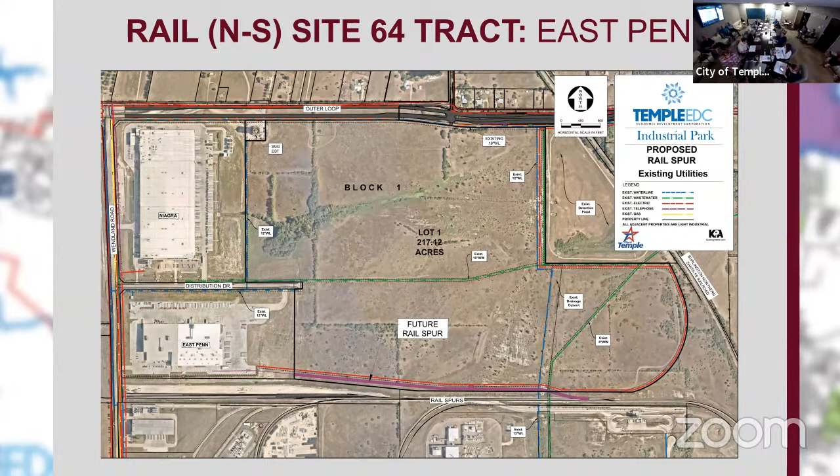We will keep in touch with them. If they want to adjust it, we will adjust, but otherwise right now the plans are ready to go, and it's a 2.187 project.

Again, it's the rail spur that goes off, for the new people, which is you, Bo. Tyler, you know Tyler is new, but he's been through this circus so many times. We're going to tell Bo that there are like 3 or 4 major numbers that we constantly look at on the funding.

One is where are we in the design, and what dollars there were, what is the construction that we're expecting. Then the construction admin is what we have as far as either David or whoever the city wants to do the administration of the contract. And then the last number is right of way, if we have any right of way. So we're always just looking at those 4 numbers, and they're always listed, hopefully within the same quadrant on the financing plan.

Second one, industrial park. I've sort of heard that this thing has already disappeared off of the financing plan, but as far as I'm concerned, it's still on here until we voted it off. And we are looking to take this off. It was $315,000, and I think we've all talked about relocating it. Do you have a comment on this or potential opportunity?

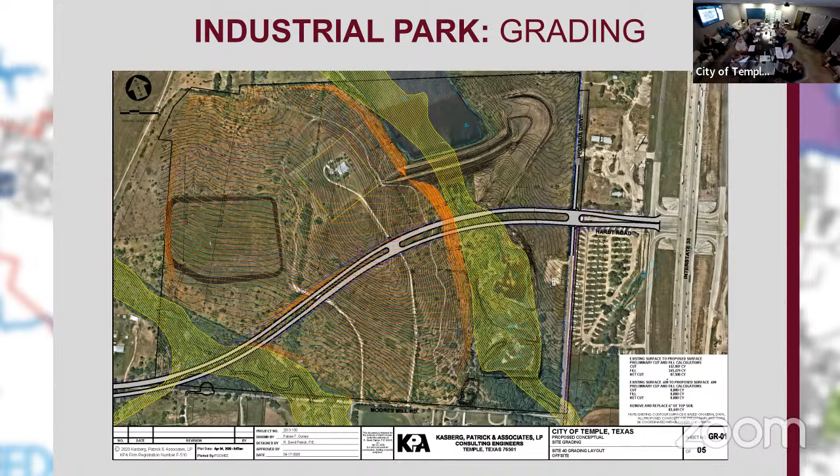Donna told me that number's already been swept too, right, Melissa, or no? We've already completed that project. It was spent on a project. There's about $6,000 left. Okay, it's gone. For this project, as we move forward on the outer loop, we have contingency, so if we're going to need something, we still have a place with some dollars set in it.

Second project, sewer extension, red line that went from right there in front of HEB up past that section, the yellow outer loop that we have. It is in the ground.

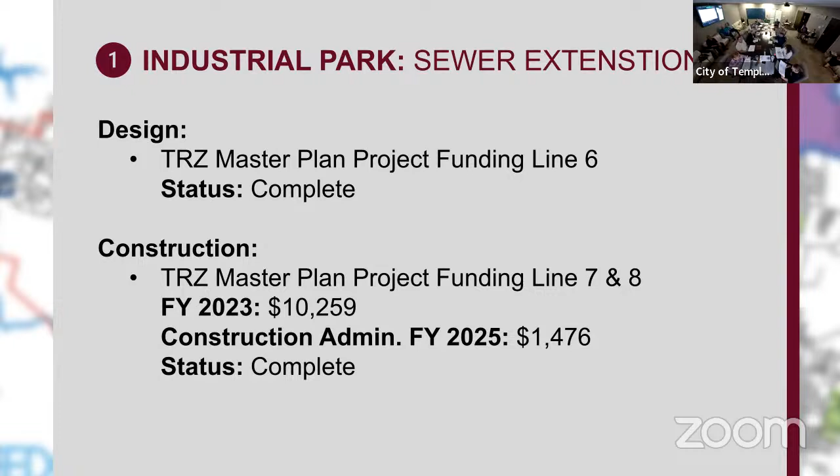Again, the whole project is a completed project, so it's one we won't see again. It's on there for another reason. Still, we will talk about that as we move forward.

One of the things I stated was in 2020, we began the process of making sure we had enough water in the quadrant. We had Rick Kasberg and Ginger come from KPA to give us an update on the whole water system. That was at the early stages of Meta. We had approximately $16 million worth of water projects that the zone took over to make sure we had water in that quadrant. So it was a big portion of what we did to make sure the industrial park was ready.

We're gonna go through these. Each one of the red lines represents additional water lines that we did to continue to push as much water and pressure into the North Industrial Park.

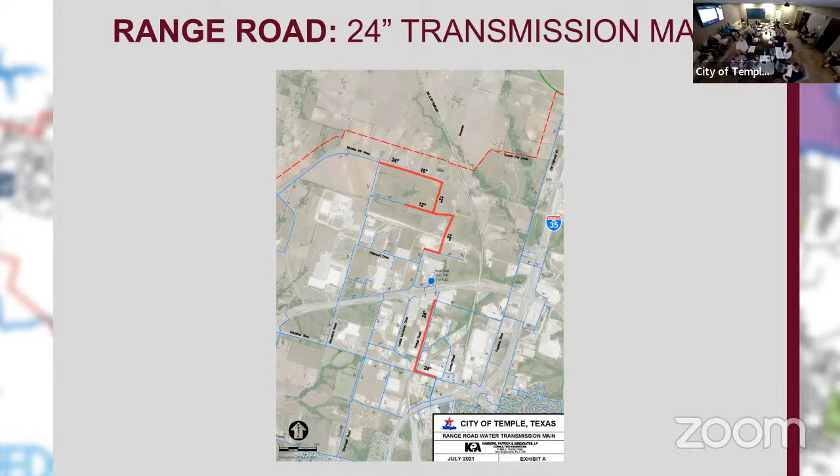One of them was called the 24-inch transmission line. It is under construction, a $2.56 million project. It's expected to be completed this month.

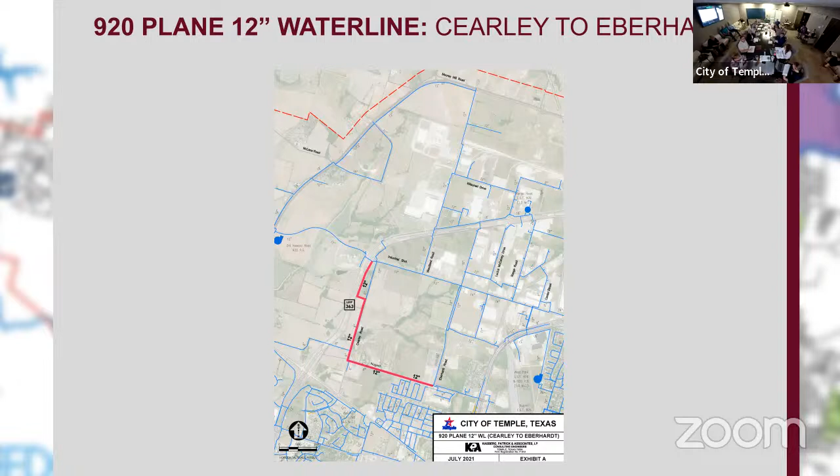Another one was the 12-inch water line Cearley to Eberhardt. Anybody that's been in that quadrant can see them going down Eberhardt for quite a while, and it brings water right into that whole quadrant. It was substantially complete and in service. We have some grass to do around Eberhardt, but that project again is done, and it was a $1.4449 million project. Again, it is completed.

The 920 plane, this is one of the major water lines that was really going to boost the amount of water we were pumping to that quadrant and to the lift station, or to the elevated storage tank. This project is 95% complete as far as the drawings.

It is $5.09 million. This is one we are planning on holding. I was a little concerned because I had it in red. Does that mean none of them are in there for my brain? Just letting you know, I hadn't gone through this, so my brain might have to adjust and actually think, which is always hard at 7 a.m. for me. Again, this is a project. Huh? Yeah, this one we're talking about. Yeah, yeah, I was talking to myself. Okay, on my, I don't want to engage in that conversation. It is a really dark one. On my slides, I use my slides to make sure I can turn the switch on, and so I thought I had anything we were trying to move in red, so I didn't have to think, right?

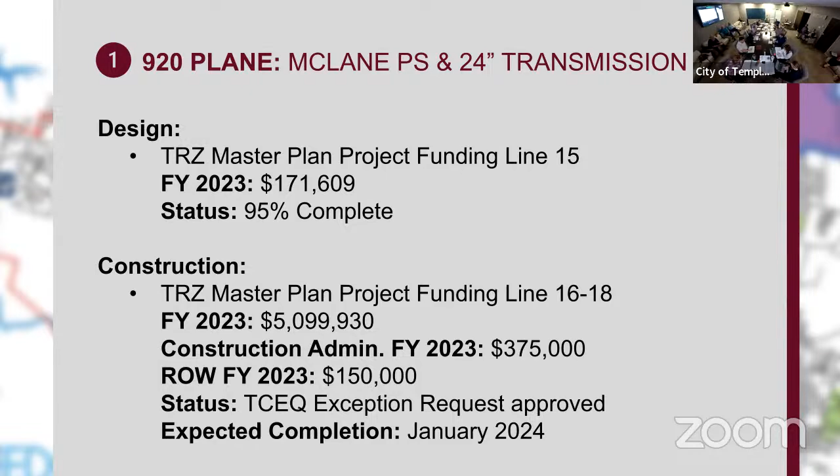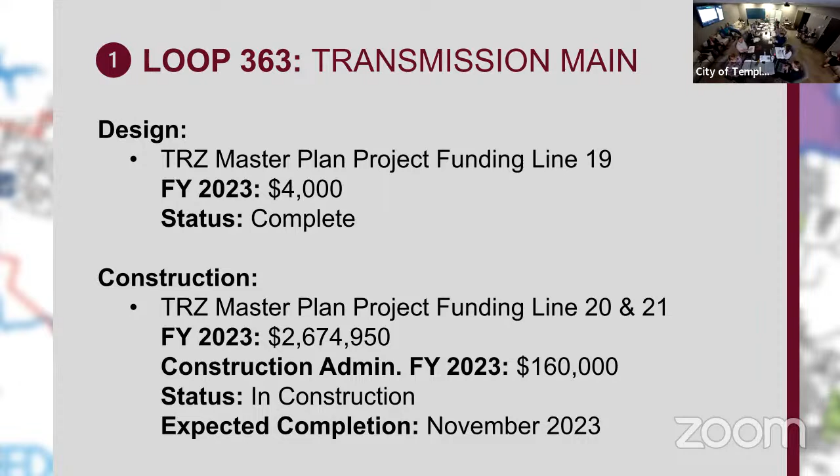Another project in that quadrant is the transmission main, which we call the 363. All design is complete, and we have an expected completion for this water project in November. It's moving forward and really enhances the whole quadrant.

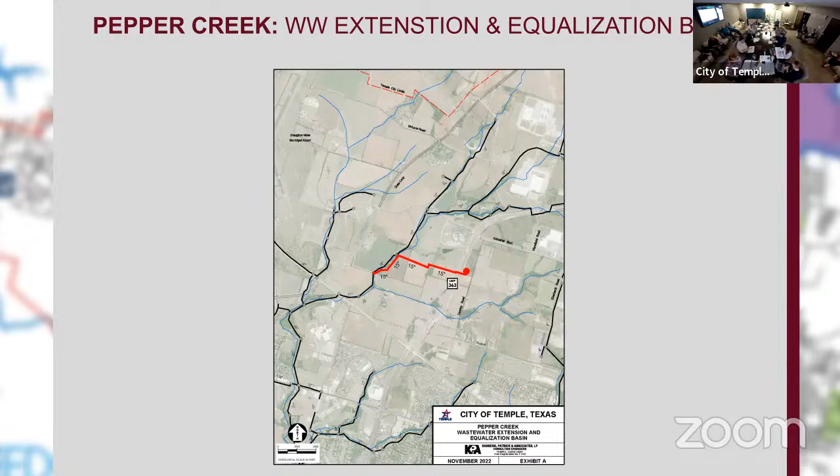We've got the wastewater extension and equalization basin. This is a sewer project, and if you drive down the loop you can see it being done. We had some savings on this in an earlier financing plan, but it's still just a project with completion in November, bringing sewer into that quadrant. It'll stay on until the next financing plan when we clean them up, but since it isn't completed, we'll keep it on.

The Pepper Creek trunk sewer - again, when you're doubling the water use in a quadrant, a lot of that water's got to end up going down to the sewer plant. Most of these projects had large water uses and a lot of discharge. Some of these have also been put on hold because the water use in that quadrant is way less than half of what they were expecting.

This is a project that we'd also like to put on hold again - we don't really need it. The last time we reviewed this with David, we still had the easements remaining. If you see the bottom corner, it tells you how many we need and how many we received. So really a double fold on this one - we're putting it on hold, and it isn't ready to be released anyway. We'll wait until we get more money and/or a heads up that a project is going to require us to finish this project.

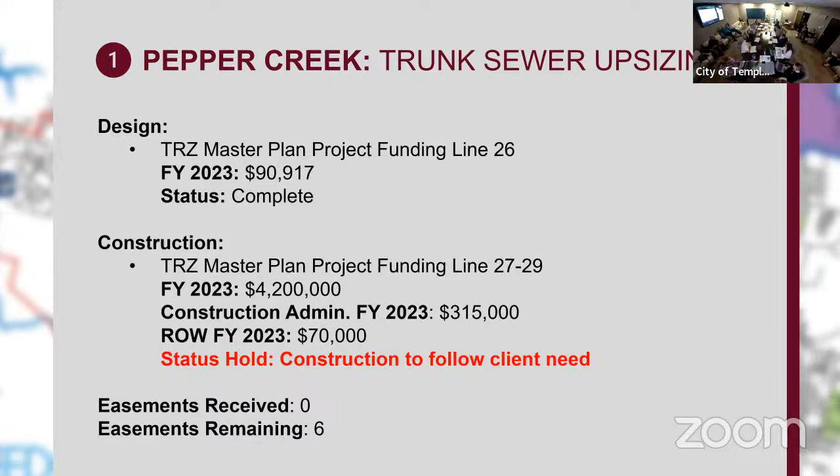If you've been out to that quadrant, one of our projects was the 3 million gallon elevated storage tank and the 24-inch transmission main. If you've been out there you'll see it - that was a $7,266,691 elevated storage tank. We're about to walk away from most of our water projects in our financing plan. We've done close to $15 million worth of water projects already in this quadrant, and I think it puts us at a good spot.

Staff has asked, John, will you make sure that I get with David Olson and his staff on these water needs? To do it quickly, we've trusted what Ginger and KPA have in the model system, and they still say that currently we have absolutely enough water in this quadrant to handle the projects that are currently there. We'll just see what EDC brings us, and we hope they do something quick so we can keep moving.

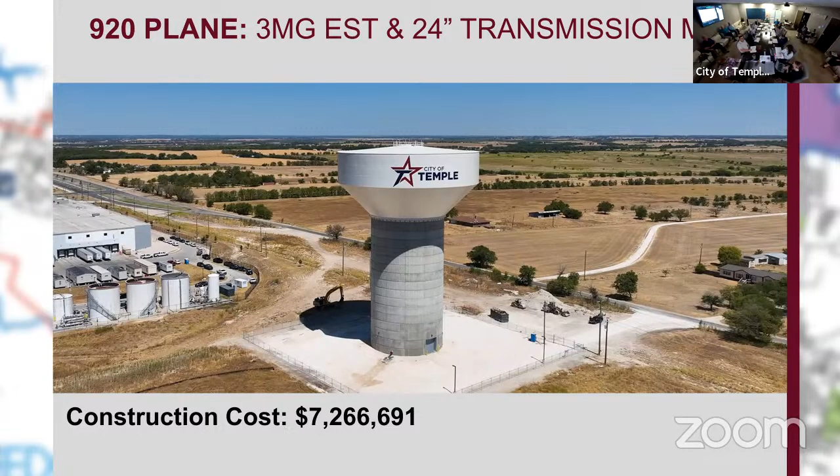That was all expected completion in November, and that will put this project to completion. One of our items on the finance plan was a little green spot there. We had a little choke point for sewer. It was not required, so all three of these right now are just not required, so those funds will be reallocated or already have been. I think we can really begin to take this plan right off our list, and you won't see it again.

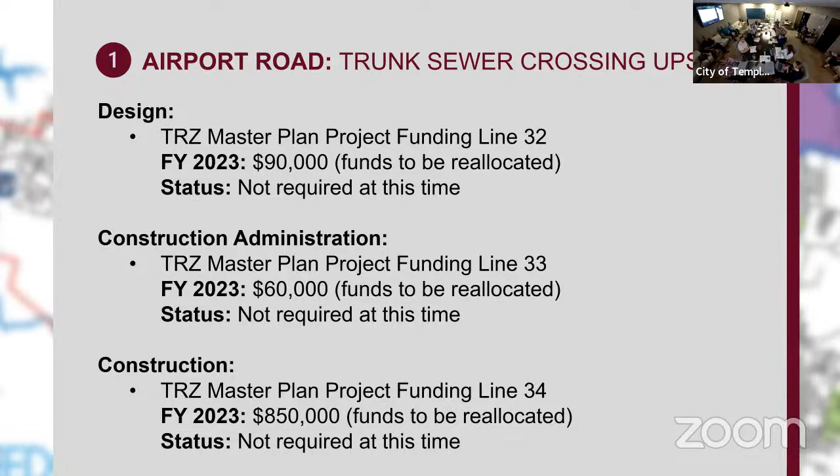North Industrial Park - about a year and a quarter ago, we realized we were getting close to about 3 really nice tracts, and if they're gone, at that particular point they were gone, we needed to begin the process of saying, how are we going to go to the north?

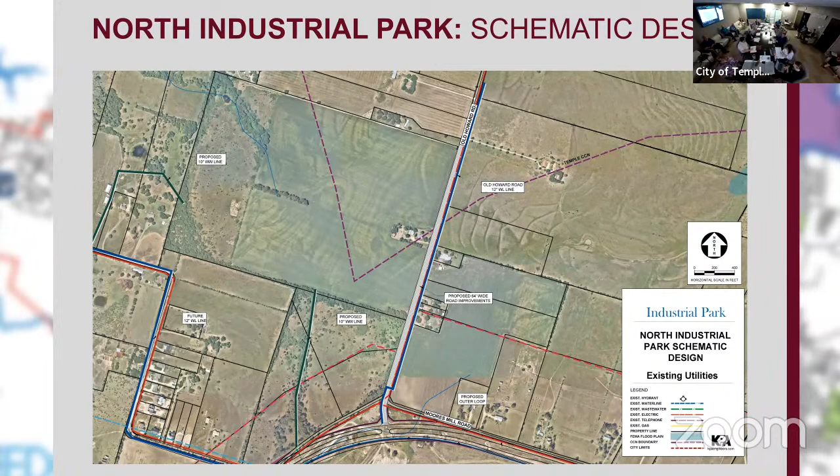We don't want to go into an executive session right now. We have done a quick master plan on this just to start looking at it, and if we have time I think I would dive into this. It has a lot to do with buying land and real estate, so we'd have to go into executive session. Having said that, we spent about $100,000 on the initial plan, and we are asking for an additional 150, working with EDC and working with clients. As we dove into that $100,000 project, we realized very quickly that we could expand the scope on this and really get ourselves another step forward so that we could actually let this project go. The slide before began to show you realignments of roads and how we're going to do it, and again I will go into the executive session later to just show you that.

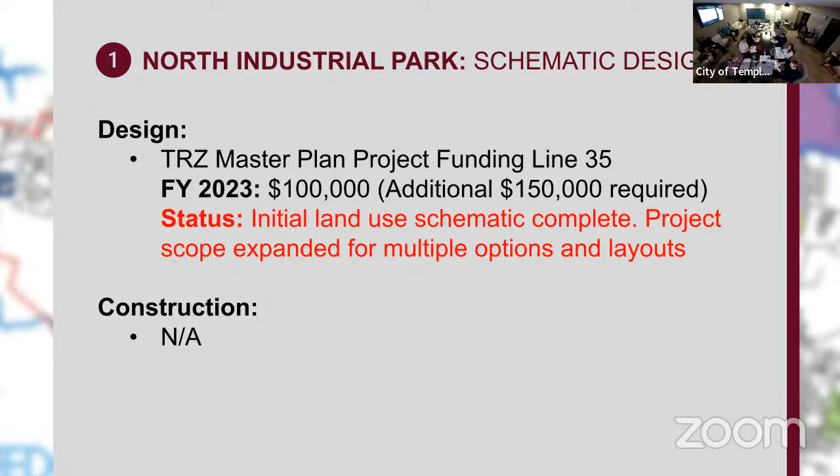But here, as far as our financing plan, we'd like to add 150 so that we can complete that project. And in completing that project, we have already begun to earmark how we will move forward so that the EDC can begin marketing the properties that we've already purchased in that quadrant. So to do that, as you know, we've got 4 things we're going to need: water, sewer, gas, and road. Our initial financing plan had pie-in-the-sky numbers that we just pulled out in sort of an original schematic. As we detailed it, we've got more detailed numbers.

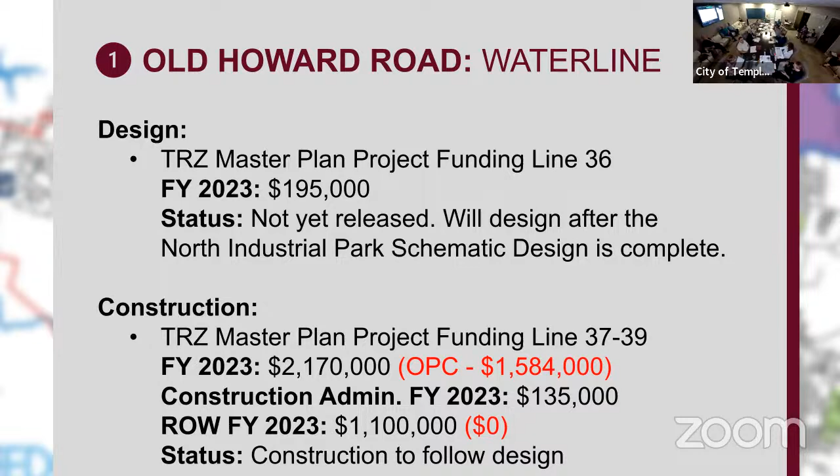We had 195 in here for that water line. Now that we know exactly what we want, we've adjusted our OPC from 2,170,000 down to 1.584, mainly because that water line in the original one went way north, and we have really pulled the scope of the water line back a little within the design that we have. Also, because of land purchases that have already been handled, if they close, we're not going to need the right of way, so we can take that right of way number down to 0.

The numbers that we had in there were working. We currently have 10 of the easements. We need 14 - I think that 10 is now at 11. We're still 3 short, most of them south of Moore's Mill. Hopefully we'll be able to get these before this project actually needs it. The 1 million is close enough.

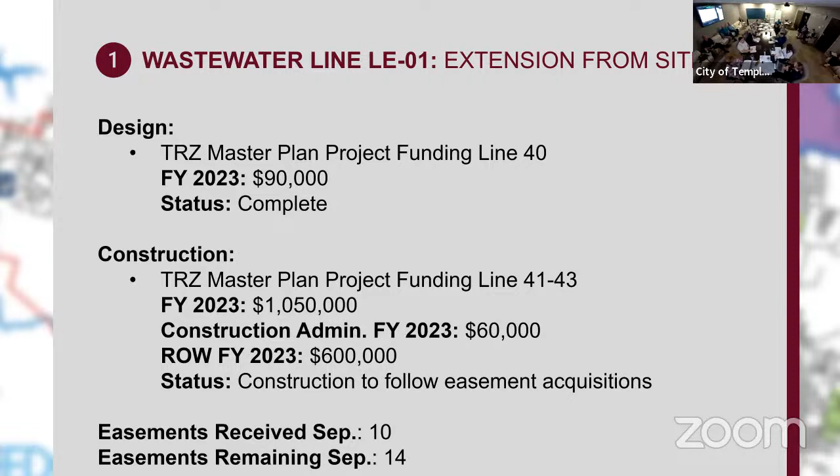Also, the old Howard improvements, our original was just going up Moore's Mill. Now that we've picked up Old Howard, and picked up some property and are working with various clients, we readjusted that road more to the master plan that I'll show you later.

So in revising that to our master plan, design's gone up to 658. Revising our OPC considerably from 3.7 up to 6.543. That's a revision, probably one of the second largest adds to this financing plan. That's why we've had to pick up dollars.

Just extending the length of that road, yeah, we extended it, redesigned it, and adjusted for our OPCs. That's an OPC, and these road OPCs are changing on a quarterly basis.

I have a question on that. When you look at the money currently in the financing plan for the water line and Old Howard road improvements, it was 8.3 million. And the new OPC is 9,348,000.

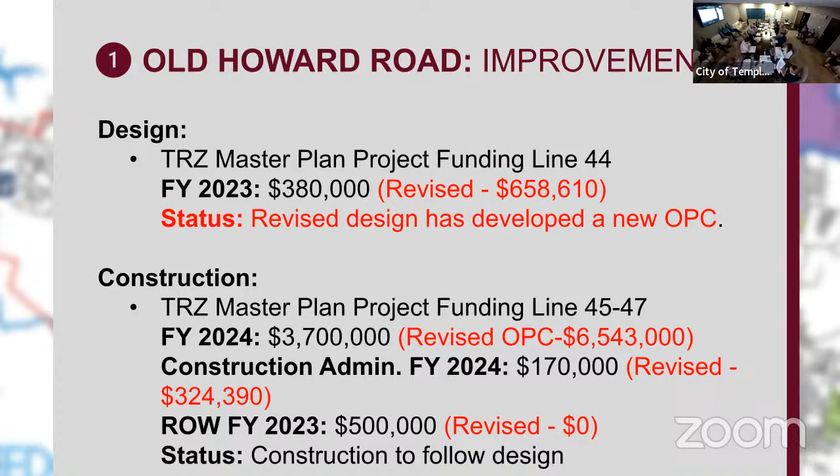You need 2, Kelly, we can cover it real quick if you want to. That spreadsheet I told you about, I don't think you're picking up the right-of-way dollars, the savings from the right-of-way.

When I take 380,170, staff, 500, and 3.7, it comes up to 4,750,000. That is correct, right? So you've got 4,750,000 sitting out there. I need 8,526,000. The difference between that is 3,776,000.

You sort by date, I think they're netting out the million on the right-of-way that we're not, on line 38. I netted that out in the slide before. You go to this one here. Dating, yeah, on my sheet, on my sheet that I went over. But I think they're fine.

When you take those lines, 36, 37, 38, 39, 44, 45, 46, and 47, you get 8,350,000. I agree. Okay, and then if I took the OPC that we had, it was 9,348,000, and then I added $1 million. So we only need 2 million.

Yeah, I kept mine by line items, right, I didn't confuse myself. And on those items 38 and 39, that's a specific project. So what I had shown on my sheet, if you guys look at it, was a savings of 1,448,000. Same thing, we're good at two. So we agree. Yeah, we're good.

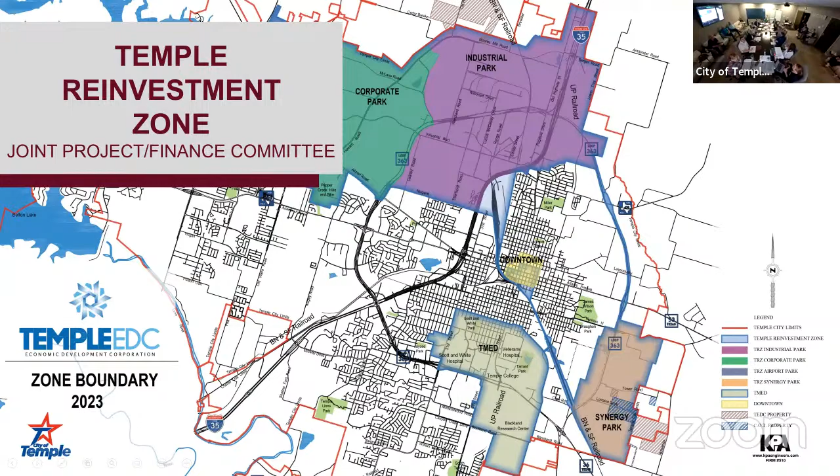Who has the keyboard? Can you hit 65 enter? That was 65. I didn't know what slide you were on, it's slide 36. 36, enter. Good job, Brandon.

That stop was worth a million dollars. This particular portion of our projects is where we picked up the most savings and are spending the most money. Once we get through this we're going to blow through it. I'm going project by project on this list rather than confusing them, like Tyler does to me all the time.

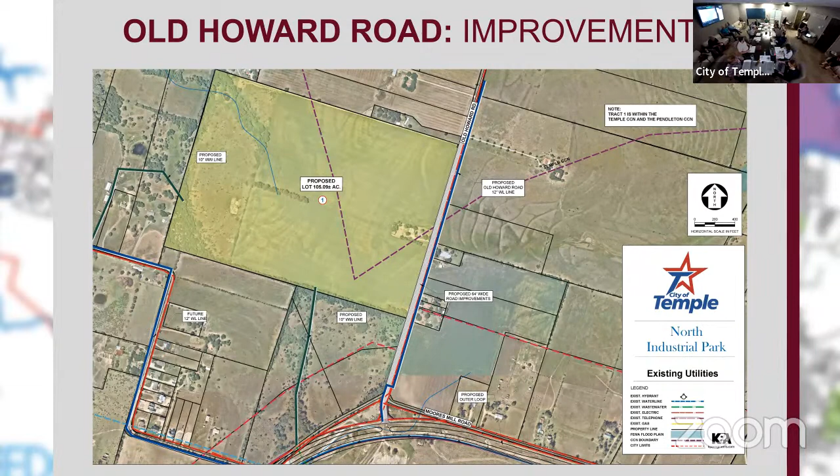And he's not a new member, new guy gets it. I think you were on slide 30. Yeah, that's slide 36.

This is an upsizing we needed for Project Ocho, to blow that line all the way up to the burn track. This is also one we're putting on hold because we're not sure what's going on the burn track. We call it the Burn tract, we don't have another name for it. That's what we bought, I didn't know if it became Site 15. We bought it after our last site certification, so it never got assigned a number.

So for you, Bo, when somebody says Burn tract, it's the one on the loop. We got Site C. This is again a 2.9 and a 105 that we're putting on hold to pick up some dollars, so about 3.5 million on this.

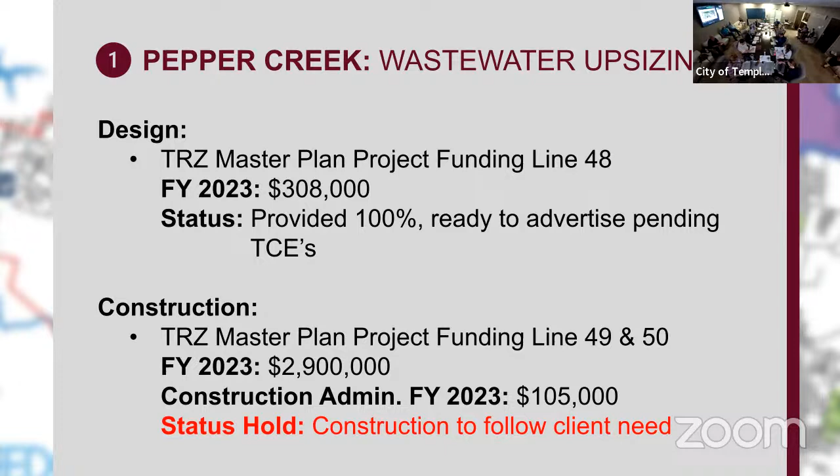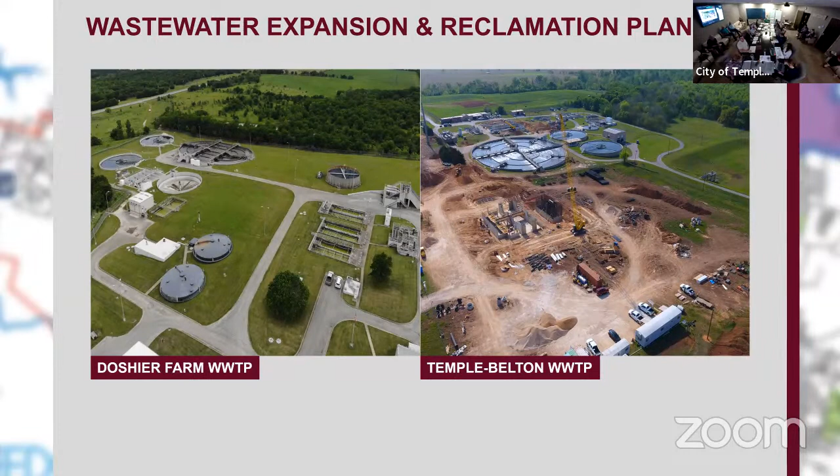We have a $250,000 study working with David on both plants, Doshier on the left and Temple-Belton on the right. We feel it's really important to get our arms around our capacities. We've learned a lot about BOD, the fats in the water that settle down. You can be good with capacity and not with BOD, so we learned a lot about wastewater that we didn't want to learn. We want to make sure that if there's anything we need to do with Public Works, we have capacity in our two plants, so when we buy land we don't just have streets, water and sewer lines out there and find out we can't get down to the plant and can't handle it. So we're focusing in on it and educating ourselves. We spent that 250, getting close to completion on the contract and laying out the project, but there's a lot of work to do to know exactly what we can do to help that project.

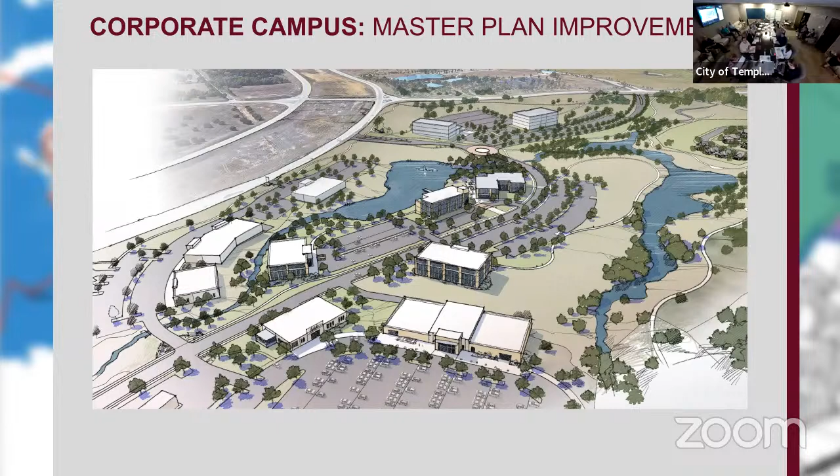Moving on to the corporate campus. We had a fairly sizable, nice-looking master plan to convert that corporate campus into a multi-mixed use project with a combination of office, retail, and housing. We still firmly believe that if growth in the corporate campus area is going to happen, we've got to follow the national trend, which is to bring people into that park. You can see that throughout the United States, we just haven't focused on it like we should.

In our plan we had an additional $750,000 to update the master plan. There's a little work to do with the McLane Company since there was a change in leadership there, which set us back a bit, but we have a considerable amount of land in this quadrant that still needs to be converted into a mixed use project. If anyone hasn't gotten the master plan, they should email David and he can give it to them. It's a great master plan, and I believe it was adopted by council. We just need to see what we can do about updating it and moving this project forward.

Pieces of this master plan are being taken and added to the master plan that Covey is doing for that north plant and that north planning area. The reason we expanded that scope of work to the north is that every time Adrian talks to clients, one of the first things they ask after yes we have land, yes we have capacity, yes we want you here, is: can you have enough people to fill our plant?

On our master plan, we are dropping in those plats that are in the area and also adding the available subdivisions in Temple, Texas, so people can look at it and say, oh my God, you guys have 6,000 paper lots and you're ready to go with capacity in the entitlements. Therefore, that question's answered and they can move on.

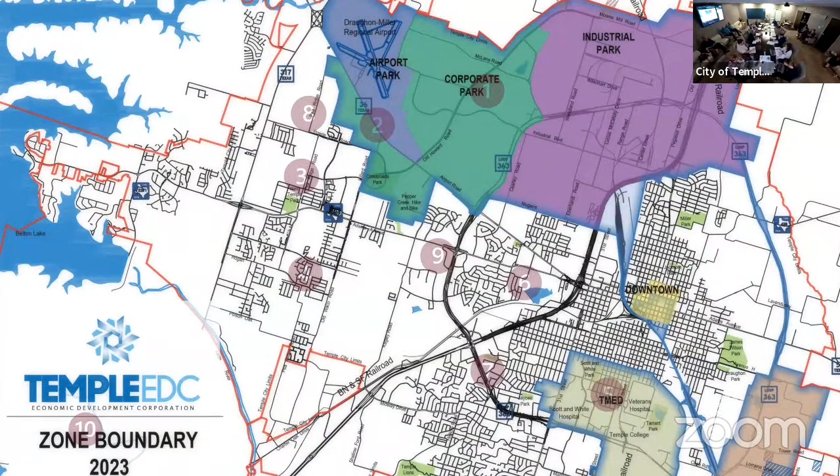On to the Crossroads, we had done quite a bit of helping on parks. Kevin, you've got a beautiful park out there, and it is just one of the shining stars of the park system in Temple. Everybody that comes through here can't believe it. I think some Waco people came into town to look at it and said, oh my God, you have the most beautiful park.

That's just this particular part, but as far as Crossroads Park, we're also out there to help with economic development. There's a large tract of land in his master plan between Prairie View and Airport that right now is overgrown.

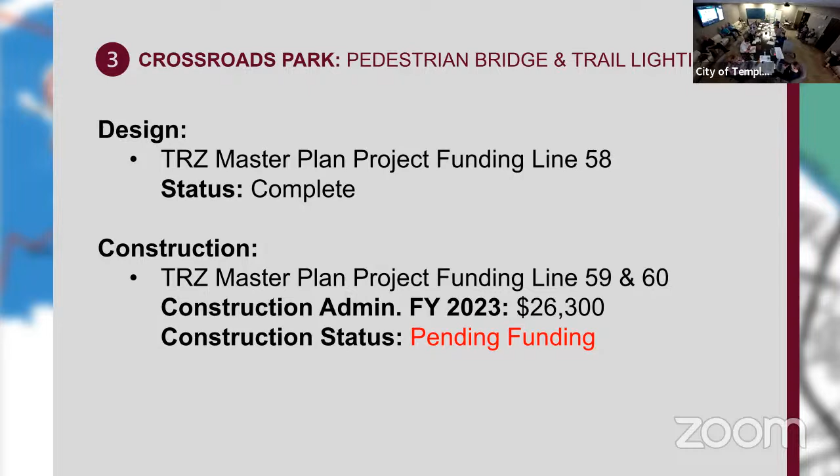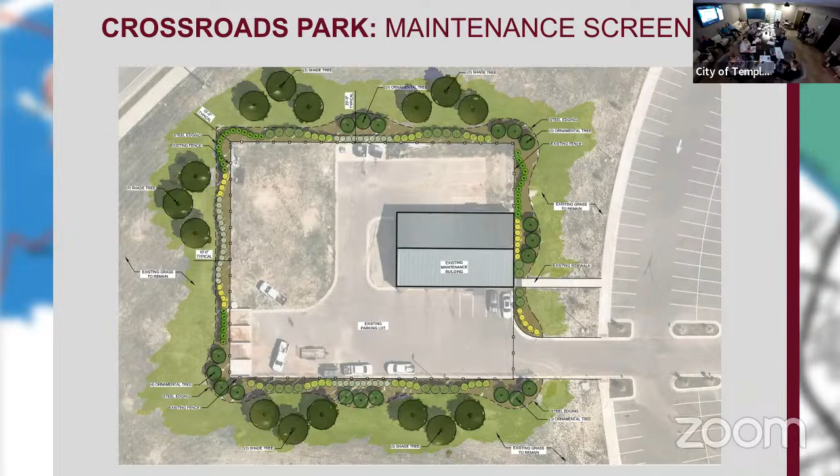We had a beautiful day, beautiful park. We had this nice little facility out there sitting on a hill, and we spent some money hoping that in 3 years those green little circles turn into trees and help block that maintenance building. That is complete, been done. Again, just looking forward to it growing and doing its job.

For those who don't know, one reason it got delayed is because we got, I believe Adrian said, 800 additional truck rotations per day by HEB, East Penn, and Niagara. Because of that, we were ready to pull the trigger on this loop, but not fly the railroad. We all decided, if we're going to do this thing, we've got to fly the railroad.

For those that don't know, the intersection at Berger on I-35, the zone about 12 years ago designed this loop to make sure that when we tied into I-35, it was ready. That proves what we can do: anytime you can spend money and get out in front of TxDOT, you can do that. Right now to the south, we're gonna take this loop and bump it back into the south side, and TxDOT's really working with us on that. What's nice up here is this section is in, we're gonna hook into it.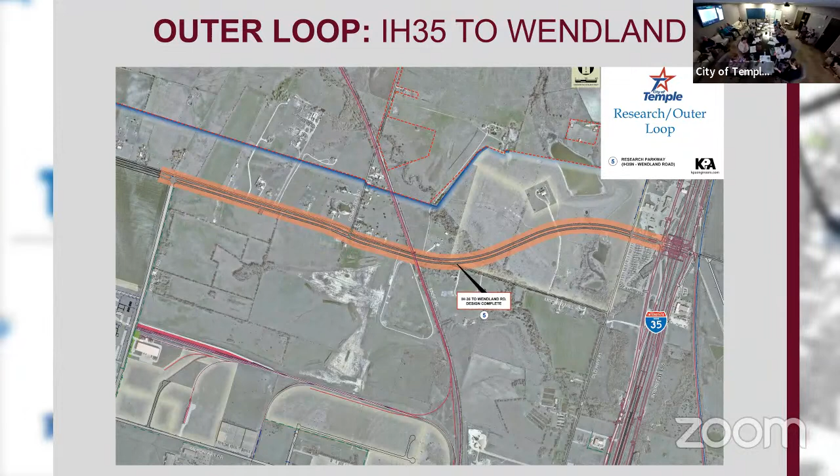You can spend a lot of time talking about that. If you go down south, we're gonna have a slide in a minute where we're trying to figure out one of the 4 places that we're gonna jump into that section out there by the DPS. What we're trying to do again is get out in front, because if we design it, they'll stick it in their plan. As you read in the paper, that I-14 connection from Belton to the Temple Loop is now designated as I-14. They have funded it, and we're getting close to where they'll be able to release that. Not only are they taking 14 from Belton to Temple, we're gonna have this major intersection of a loop there. So we're gonna win by making sure our designs are ready for them and already evaluated. It's really a good deal.

Again, 34.6 — it looks like we're gonna need to take that number up to 43,683. My numbers, you know, Melissa and Tracy, you guys always clean up my numbers. I think the big deal here is you take what we had and add everything that we think it's gonna take, with the caveat that we're adding 2 million for contingency, a fairly big project, not to have additional dollars.

As you heard, David thought he was gonna use that 315 and add to it on our very first item. Already there will be items on this project that we're gonna have to come back and do change orders for. Tracy wanted to make sure she had dry powder for that so that we can do it. That's the 2 million.

This is a pre-meeting, so that by next Wednesday, Tyler and Gary will have really worked with Melissa and Tracy to make sure that it balances. We're still a little bit out of balance, but we'll get it figured out.

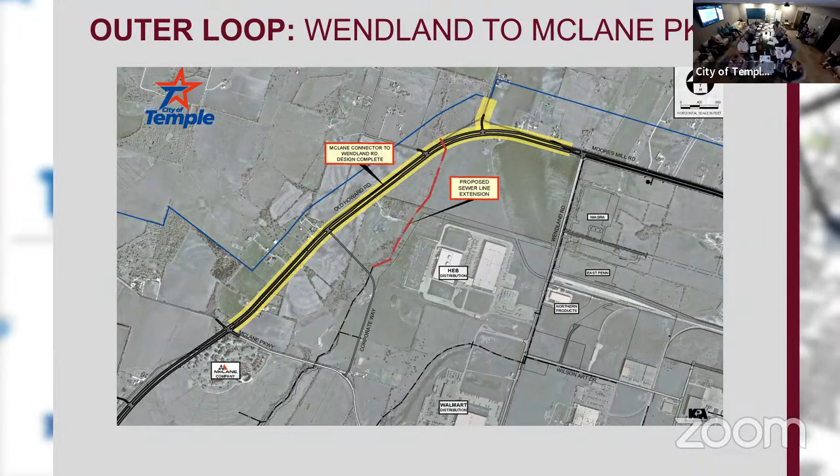This loop, that's the red line we're hooking onto that Bob wants to hook onto to go north - this is really just talking about that particular part of the loop that is now complete. I think all numbers, and we're moving on to the next piece with the project we just talked about.

This section was McLane to Central Parkway, which is also complete and has been done. So these are all projects that are complete that we won't see on my slideshow anymore. The outer loop section just got bid.

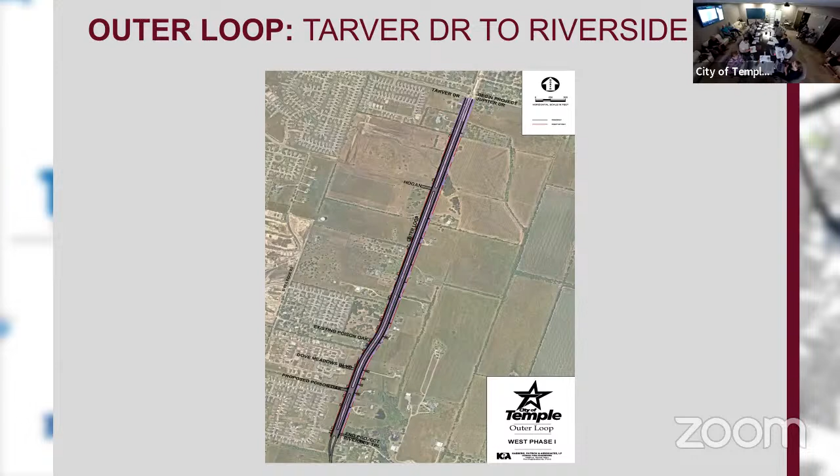Now we're heading south. We have helped the city on the south loop, which goes from 2305 to I-35. This section is at Tarver and goes to Riverside Trail. It is released - a pretty extensive drainage project is underway by the city right now. But this gets you almost to I-35.

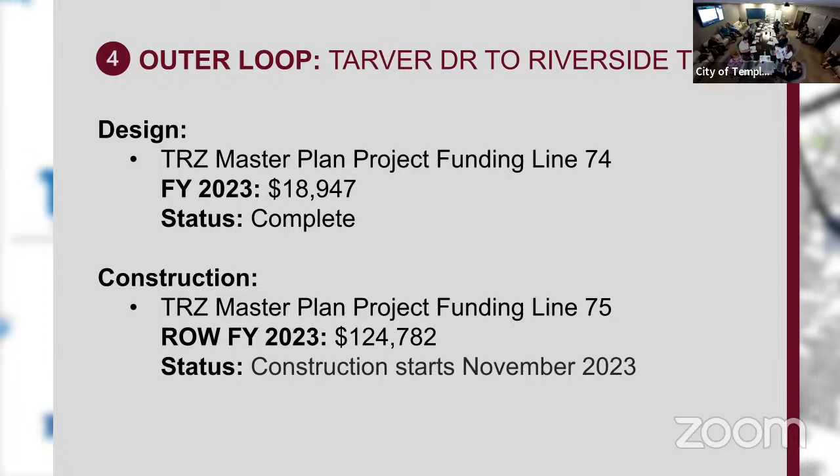For us, we funded, I guess, some of the design work and some of the right of way. It really wasn't a zone project - we're just backfilling and helping these projects get done. If we weren't doing this project and the next one, we wouldn't be connected into I-35 where that I-14 is, and we wouldn't be able to do it.

That's this slide right here - this slide is the next phase. As you can see, David, TxDOT made him say, okay, where can you connect in? Here's all the places we can connect in. We had chosen a route, and they're like, that's really good - we'd love to spend as much time as we can to slow your project down so that we can - if somebody's on there, sorry.

We had a route picked, but they want to make sure that something that was built in the 1700s isn't underground there, and that we're going to disturb it. You gotta love the state - they do give us money, though.

This project, we're still hoping - look at David looking good. We really feel that the dollars that we have for the right of way on here is considerably out. In his estimation, we could still be a full year in getting TxDOT's approval, and therefore probably won't even begin doing too much of the right of way acquisition until into '25, '26.

So we haven't bought any right of way on any of those. What happens if they change the route? Good question - park, linear park.

They do get to weigh in. That section of the loop we had, three slides ago, took three years just to get through the state. Really, we're the ones doing the right thing. We're getting these things laid out there, laying them out and pushing forward.

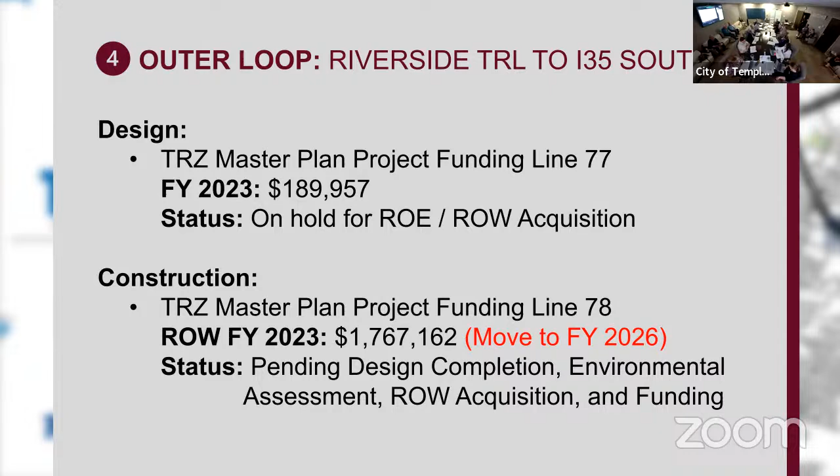As properties come available, you try to buy them up and down that whole thing out east. We've been hit by so many large tracts that red line goes through to purchase, but we just don't have the dollars, and it's 30 years out, so we just sort of move on.

There are sections we'd like to begin the process of seeing if we can move on, like little teeny segments. This one segment sits almost on the current right of way — you're only going to need to expand it north and south. That's up at the burger. That's a section we should look at. It's real close to I-35. There are individuals looking at it. You've got pretty good industry there, and it's very problematic because the Union Pacific road is right on I-35. This will be a fun one to do, but we should at least know that it's there.

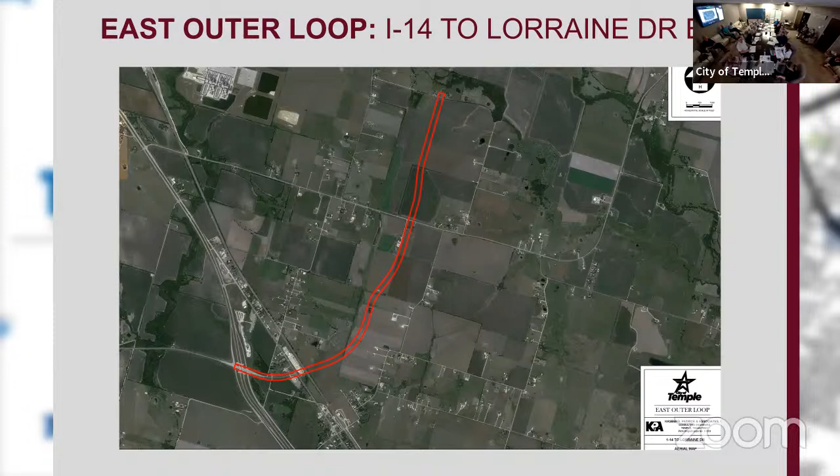So over the next 10 years, we need the process of figuring out how we can connect the two. That project is complete — David did a quick flyover. We've taken it and put a red line on the paper to see if we can take it anywhere.

Moving on to the Synergy Parks — down where Panda is. You can see Panda in the bottom left. The pink is Green Data. They make Bitcoins and they are operational.

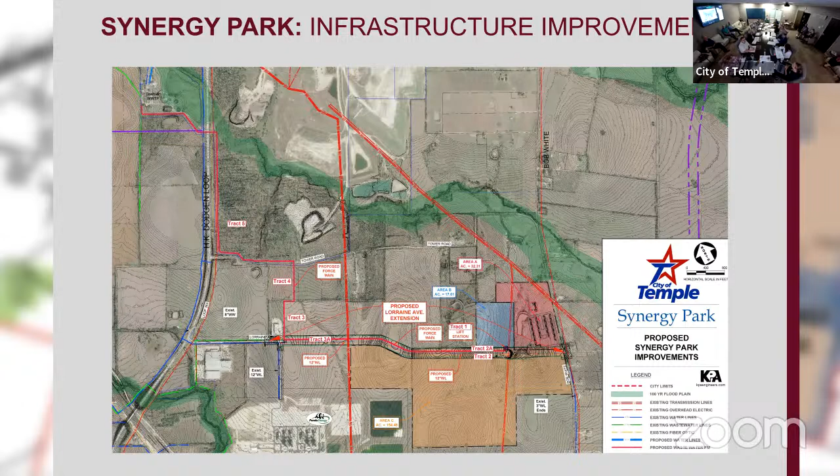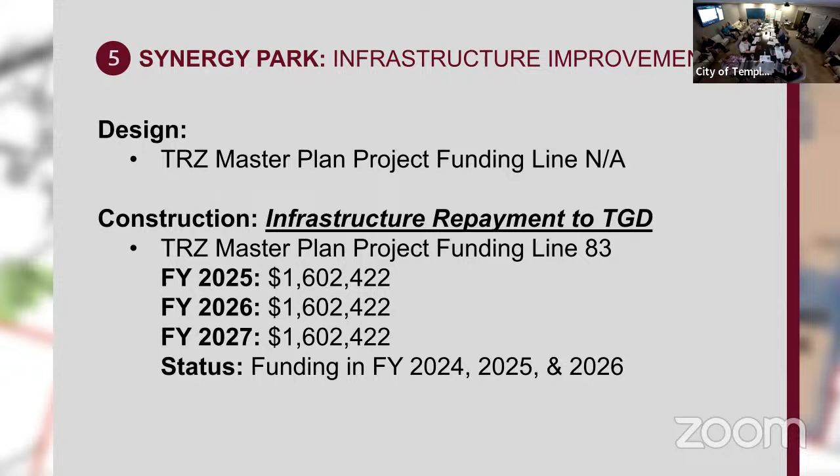They have dollars they've put into this project, so one of the first numbers you see on the Synergy Park is the amount we will be paying them over a three-year period for the dollars they have already put into that. They've put an incredible amount of time, and are still putting time, into this project and this actual quadrant. Again, in your finance plan, those will pop up — those are commitments that have to be followed through on.

In the process of Green Data coming and land being bought over there, similar to the northwest quadrant, we realized that the southeast quadrant needed water upgrades. We began working with Public Works and staff to determine if there was any way the zone could help. Anytime the zone can take increments and plug it in, it frees up dollars for the city to use for private versus commercial uses. So it's been a good way for us, just like the Northwest, to supply dollars using the increment we've been given and blessed with by the people who created this. We thought we should do that in the southeast also. It was one project, but it was a lot to digest as a single project, so we split it up.

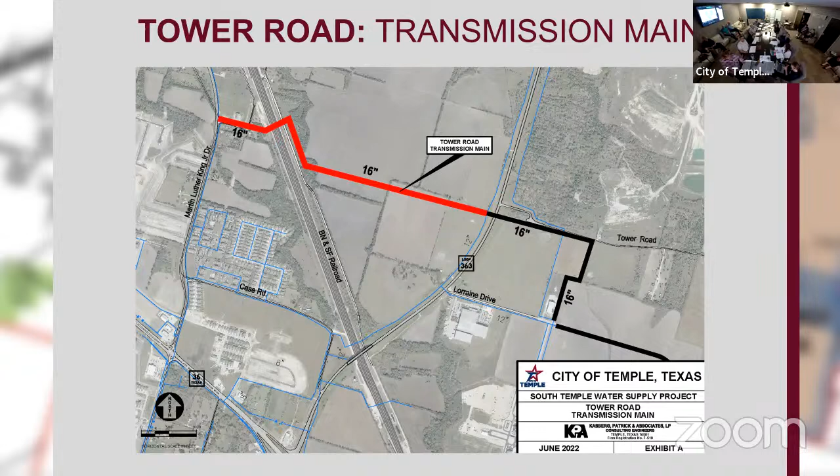This is a really important, small piece of water that comes from Lorraine Drive, goes underneath the tracks, and hooks into a water line over there in MLK. It really increases pressure flow. And, getting a bit off my skis here, but this is an important connection to begin making sure that Synergy Park has sufficient water to take in a client or two.

All right, it is currently ready. I think we're still waiting for some easements and ROEs, which is right of entry. You got to have right of entry so you can go do work on their property, and then you come back and do ROW, which is buying the right of way. This project, I may not have updated, but I think the plans are completed and sitting at the city waiting to be signed off.

This is a project we really need to get going. They've got a pump station — Avenue G pump station — which is not our project, but it's a significant water project that helps that quadrant. This will be the first project we do to add on. It helps the flow down there so that we can possibly do something on this yellow square or some square.

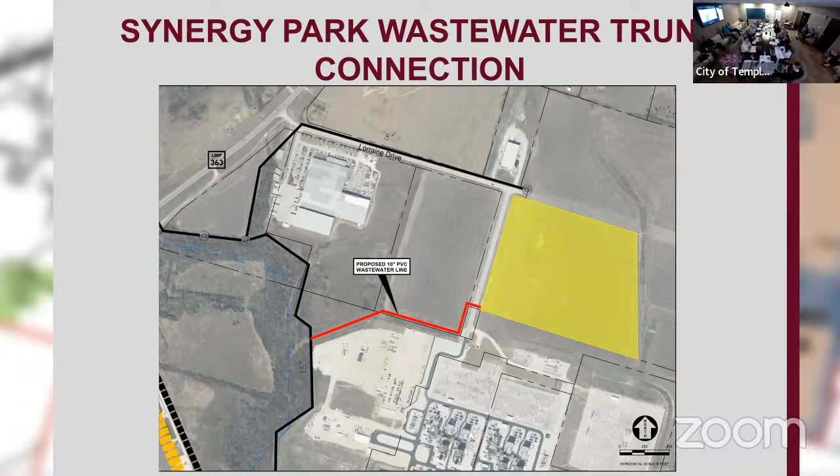This yellow square is in the original zone, and you can see Panda to the south, and the Best Right or whatever they're called. One of the things we learned in the process of making sure the southeast quadrant is ready is that this tract of land doesn't have sewer, but David, when he did all the designs down there, made sure he had right of way to bring sewer over into this piece. So I asked, how much is that water or sewer line going to be? The design is 65,000, construction 650, and that will open that up. You cannot sell that yellow square without knowing this number.

Now, we put numbers on here for 2024, 2025 — Tracy knows — so we don't have to do this project, I just threw it out there. It needs to be on our sheet, ready, and somewhere in our financing plan so that if the EDC marketing team goes out and sells that, you guys know what the number is. We know that. My suggestion would be to get the design done and on the shelf like other projects, because if somebody buys that yellow square, we have plenty of time if the plans are done and the right of way is there to get that sewer line done.

So where you plug this in is your call. Financing — Gary, Tyler, and Bob — this is the project we need on the radar screen. We need to put it in our plan, and you plug it where you can. If we can pick up $65,000 and do a little dance, it would be ready. If you don't have it, we just wait.

This is the water system to the southeast. We could go into a long story, which I would love to do, but everybody wanted to get to work. I would tell you that the southeast quadrant is one of the more important quadrants for our community in the next 25 to 30 years. Everything happening to the south of us, like Samsung down 95, and our move over with I-14 heading to College Station, with available land and available sewer.

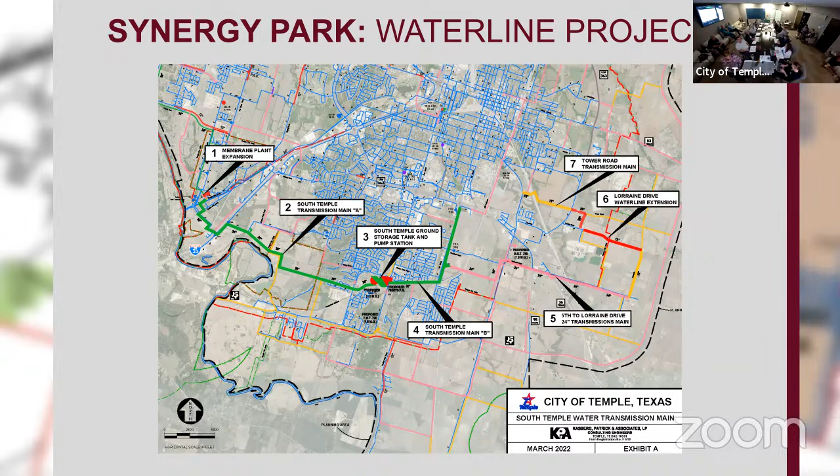Right, so this is one section. It is under construction - well, not under construction, it is under design. Again, the same conversation we had - if we can go ahead and get the design done, that really helps.

This particular project had 59 right of entry, 59 pieces of right of way that we will need to build that $10 million line. And I guess as of the last time we reviewed it, we had zero. So those are right of entries - you can't really design until you get your ROEs done. A very important project, and we just keep working with staff to attempt to get these ROEs done so that we can move forward.

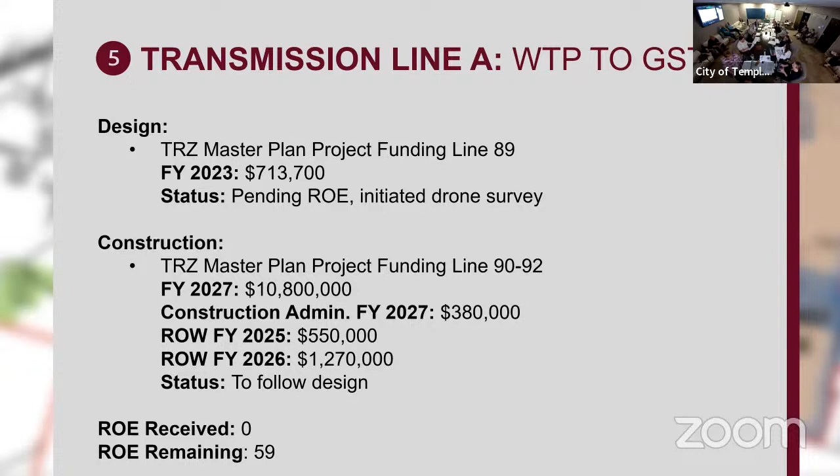There is a section of water line - this is just the pump station, that red line. It's a separate actual piece to the line between 5th and 31st. It's in progress, it only needs one piece of right of way for it to be done. It's a $6 million project. It's in our financing plan.

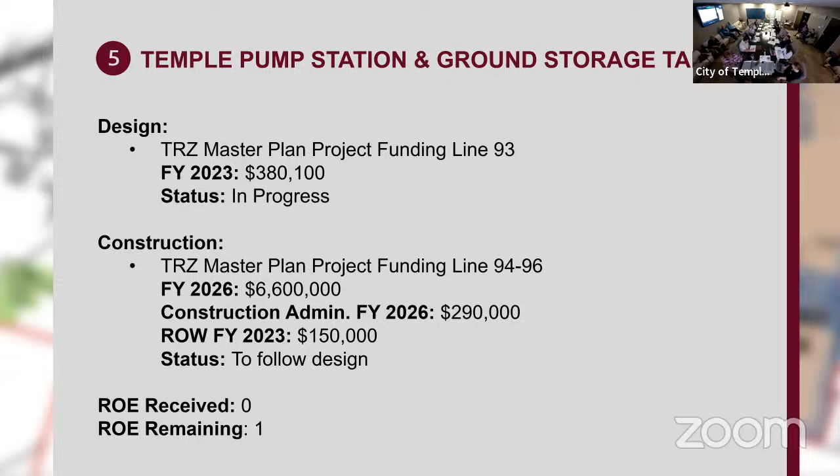Again, I think each one of these pieces, we will get the designs done. These funding mechanisms will just come when, if the dollars are available and if the project is ready to move forward. This is really a 1-year-old project, you guys - 2023 is when we started these water projects. Again, the very first thing you try to do is get that design done so that you can determine your right of way, and start your construction. That fiscal 2026 possibly will be a floating number until such time that the plans are done and all right of way is apart. That's the same for most of these projects.

You've got the GST - that's your, what does that stand for? Ground storage tank. Yeah, ground storage tank to Lorraine - that's another piece that's picked up at 5th Street and coming over to Lorraine. Again, you can just see the volume of right of ways that are needed for these projects.

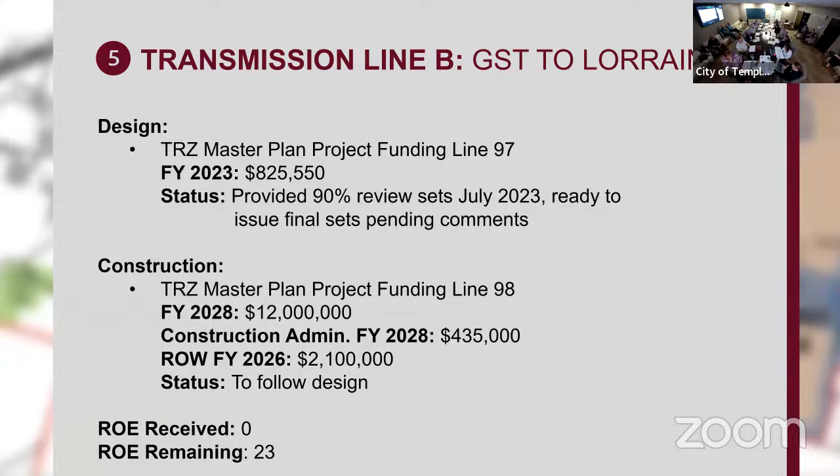This one, we need 23 right of entries. We got $825,000 sitting there ready to go. This one's got a 90% review set already been completed, so this one is, again, we'll just be waiting on right of way. So the construction plans and designs will be sitting on the shelf. Our fundings, those 2028s, the right of way is really, again, just dependent on getting those completed.

This line C runs along the railroad track. There is a grant that the city has right now to build that hike and bike trail. I believe the city's got a fairly large piece in their budget to take it from 5th Street, possibly all the way considerably down to 93. That's it - we do have some funding in our budget, and we're also trying to get some grant funds to be able to rehab the bridge and get it all the way to 93. This is a great project for Temple, Texas to get this hike and bike trail. We've got some substantial hike and bikes up in the Northwest.

As a developer, I was always skeptical on sidewalks and hike and bike trails. I'm a born again - I will tell you that when you put these in, it's probably the number one used item of any of our subdivisions. And I really do say, you guys, I was not one who believed in it, and this hike and bike, it needs to be done. Probably one of the number one search items for community relocation. So if a company is going to move in here, if you look at the Google searches, the number one search for owners and those who want to move into a community is to look at your hike and bike and sidewalk system. Crazy thought, but it really is. So we as a group are supporting anything we can do to keep that project going.

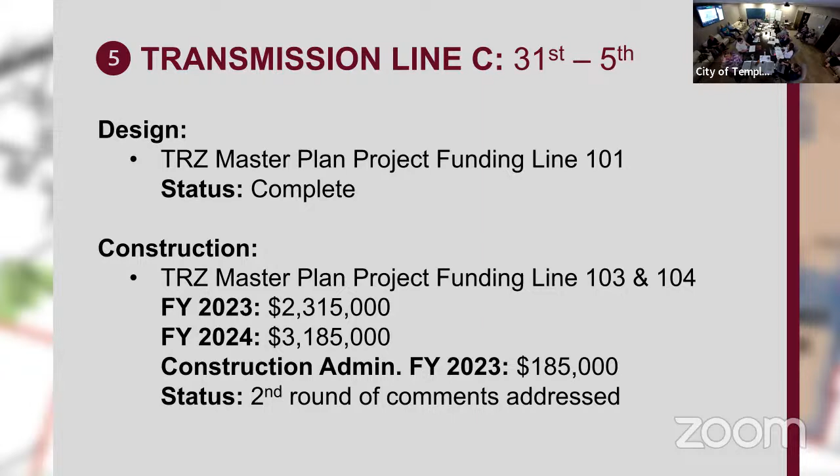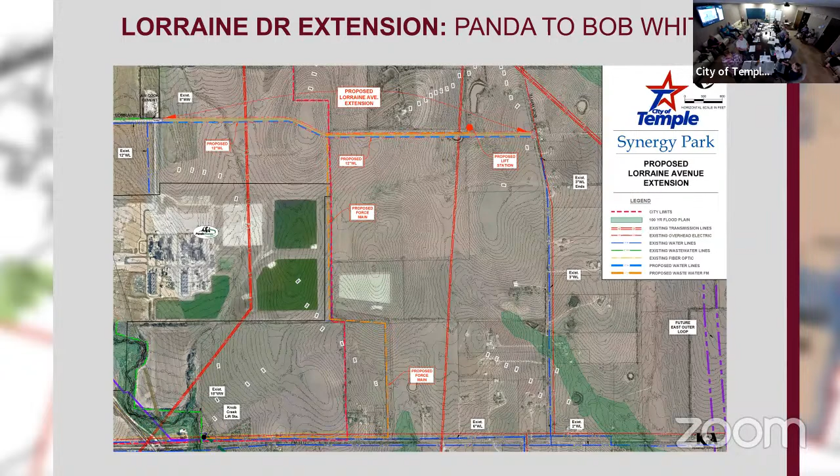This section is funded. Plans are done and probably will be released hopefully in the next 6 months. The Lorraine Drive - this is a road. If you go out there, it goes to Green Data. It's already rough cut, force mains up and down it. This is one of those things that I throw in Gary's lap.

This thing is funded for 2025. If there was any possible way we could look at this whole plethora of projects we have and move this forward, it would be worthwhile. We've got land, we've got water, we've got sewer, we're ready to market this. It doesn't have a road and it will be built in 2025. Melissa, Tracy, I don't think by the looks of anything moving it into 24 has any chance. But if there was a way to flip projects that we're not needing in 25 into 26, and move this thing forward, it would be wonderful.

It is in. It's in 25. I meant you want to 24. Yeah, okay, it's ready to go. I know you've seen that, and it's just, I keep putting that on there.

From project chair, that's it, right? As a zone, EDC continually calls us, you drive out there, this is ready to build, green data on the other end, they're sitting down there with a billion dollar plant, they don't have a road in front of them unless somebody else has already done it. I wish we could move this. How about that for commentary? Noted. Yeah, you know, it just needs to be done.

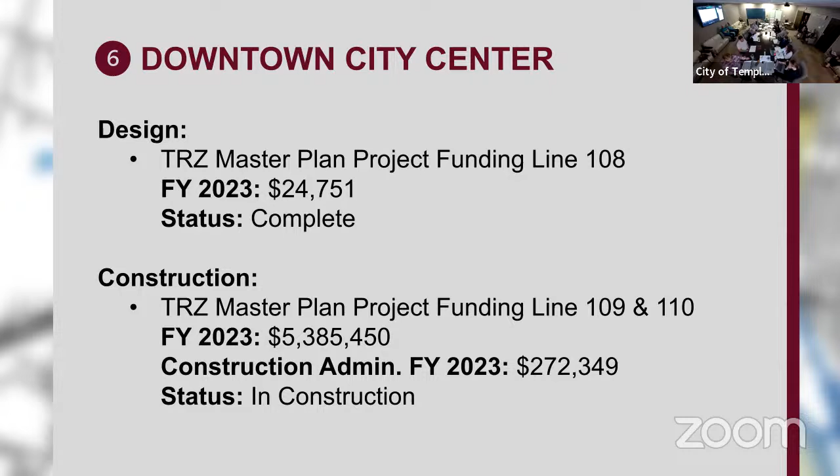Is there a date on that? Which date, the one they gave us? Yeah, there's all kinds of dates on that. Not to be funny, but they've given, is there a current date? Coping came in, so that's a good sign. You know, 6 months? No, but we've shifted, you know, we were going 6th, 2nd, 4th, Central. We've shifted 6th, we've done, we just gotta strike that. We're gonna go Central from 6th to 4th, because that's what's open.

And what they're doing is beautiful, I mean it's gonna be incredibly beautiful. That project is just waiting on that. Right, and so they've given us multiple dates, so our completion date is already past us, the original one.

I'm sorry to interrupt, David, what did you say you were going to be in the flip? Yeah, so we've completed, you probably seen it paved, in front of Weirdos and by the 4th Street garage. Scaffolding, so originally we were gonna do 6th, then go to 2nd. But, you know, Turner Behringer is still working through the Texas Historical Commission, they had to do some things, so we still have scaffolding there.

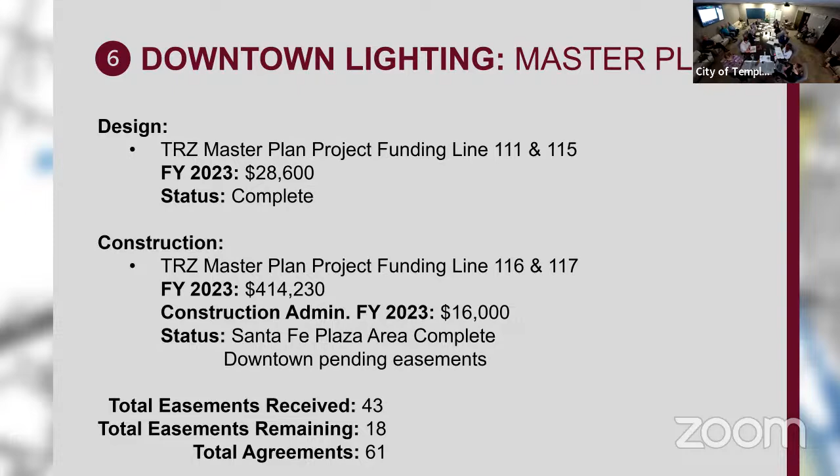The lighting is just one of those projects you wonder why we've all done commentary on. About 10 years ago, Leadership Temple came and had $30,000 to do this $400,000 project they were going to do in a year. 12 years later, we're still trying to get people to allow us to put lights on their buildings. Kudos to the city for attempting to get as many of these properties ready to go. There were 61 we wanted to do, right? We got 43, and my understanding is we're pulling the trigger, and it is what it is, and we'll do what we can. You would never think 18 wouldn't want a light on top, but we just have to move forward.

MLK festivals, you guys, is really a wonderful thing. Electric just beat the heck out of us, and electric will continue to beat the heck out of us downtown anytime you're trying to take something above ground and put it underground, take old switches and turn them into new switches, take old transformers and put them into new ones — you're talking big dollars. We ventured into this project again 15 years ago, and we're rebuilding downtown. The current project was 526, I believe, but that's completed. So we are done with the MLK Festival Fields, which is a good project.

First Street Garage is actually open. If you haven't gone through it, you should drive to the top and stand and look over, and then you've seen a project we've done. This is a really great project for us.

AI work? No, actually we shot it at night and shot it during the day, and I take zero credit for this. I couldn't do this if I wanted to, but we have some staff that's pretty talented at it.

That's a great project to have done, you guys. It's a $6 million, almost $7 million project. It's completed, and lots of people are parking in it. I don't know what this one's doing if we didn't get it out of there, right? We've already talked about it.

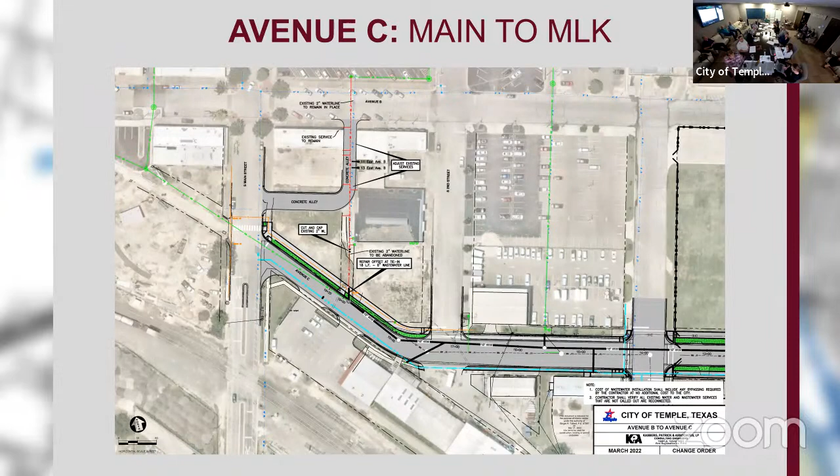Avenue C, Main to MLK — a lot of this is already done, you guys. This section is, again, doing the downtown stuff, which is important, getting us over to MLK, and then from MLK all the way to 24th Street. A lot of this has to do with getting easements and right-of-way so we can go from one place to the other. We got construction funding out there in 2027. Hopefully we keep moving this project forward.

Just wondering, did I change anything? No, better look at my notes. No, I think we're still good to go.

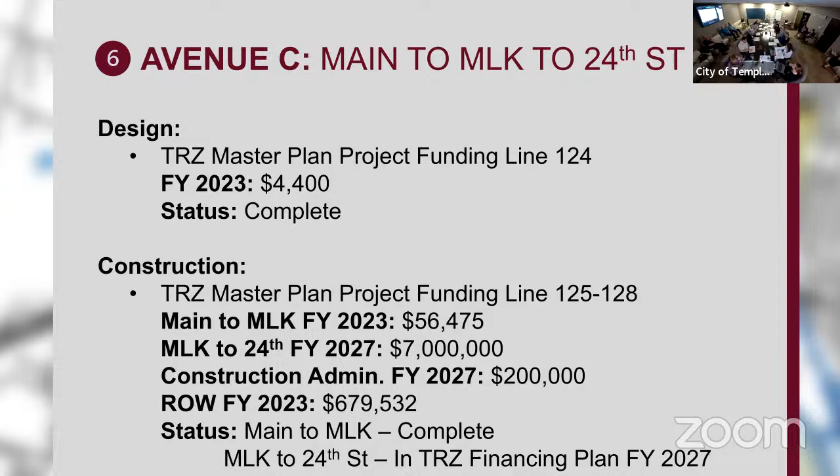Both of these projects are long-term — well, not long-term, but they are brownfields. You're going through other people's properties and have to amass all the right-of-ways to deal with this 24th. C to Central is actually pretty close to being ready to go. Construction of 2.8 million in 2027, waiting for dollars.

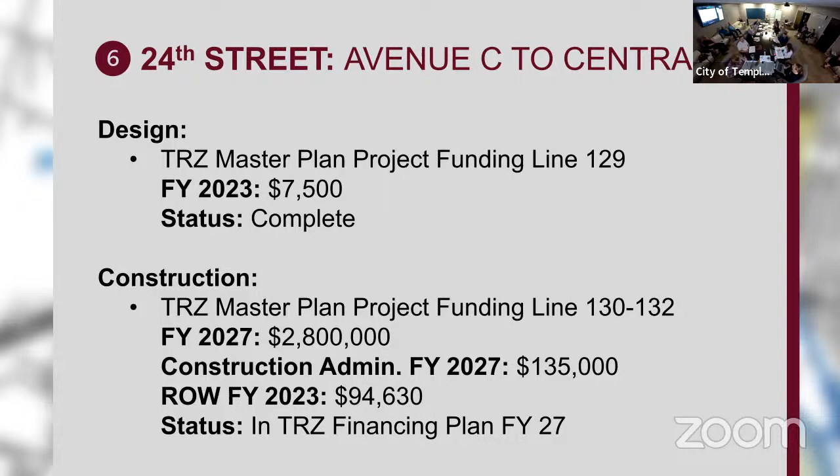And this one — we picked this, and there were some questions on the project committee about this project when we were out searching for funds, you guys. We had 1.7 million for this. We did a 30% design. We were spending a ton of dollars. I think we were pretty full of ourselves and thought we were going to get a lot of increment, and you have to have in your financing plan ways to spend it. This is one of those where, as a group, we said if there's any way to put this right-of-way on hold, since we're really not totally pushing over there, we can pick up the 1.7 and do it when we get an increment. That's one of those things I throw in Gary's lap to work with Tracy and Melissa on, to see if they need the 1.7. This would be a great place to put a hold and push it.

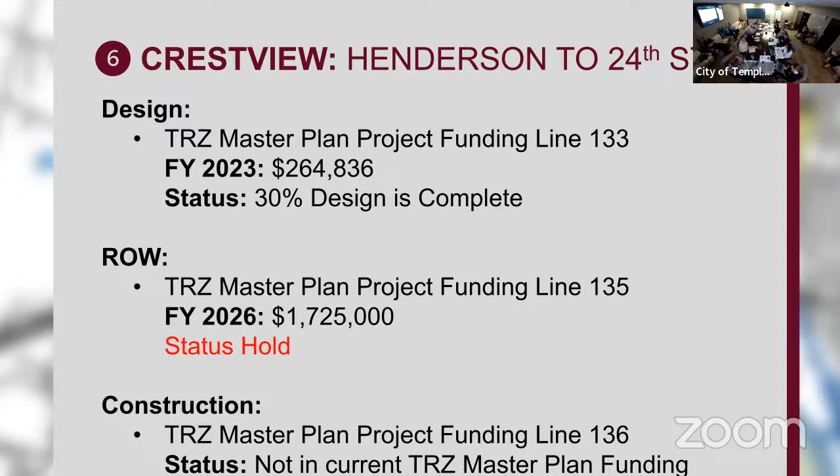In 2025, a $4.6 million project. Since it was in 2025, we have kept that project moving forward. This is a project that is possibly one that we definitely have to put on hold.

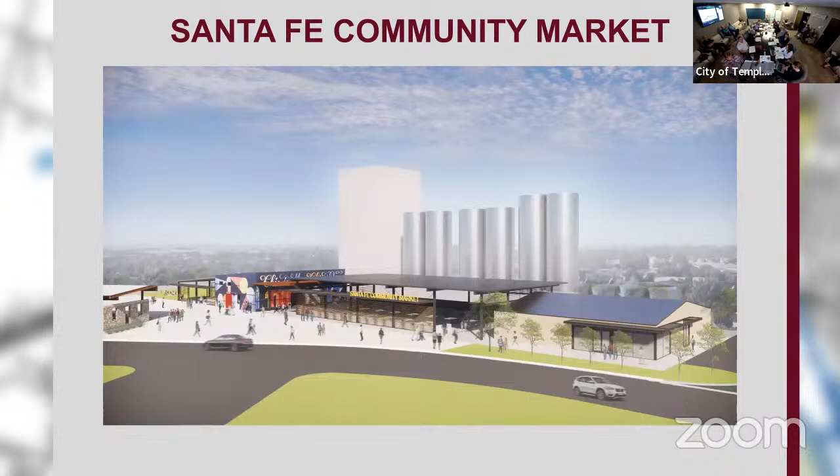We have the design work done on what we're going to convert to. If you remember, we did a little bit of a dance to make sure that it was in budget. We really looked at this plan and it's on budget. Plans are done, building is empty, right? Wonderful project to move forward. If you can see this, it's more open air now than glass.

But because those dollars are sitting in the kitty today and we need to move it, this is one that we think we put on hold at least for a year or two, and we may come back.

Gary, in 2025, do we come back and say, hey, why don't we grab those Third Street dollars and do this project instead? We're having a financing plan choke point in 2024 to make sure that we can finish some of our priorities. And so we're shuffling projects, you guys, in the short term to make 24, 25, and 26 balance.

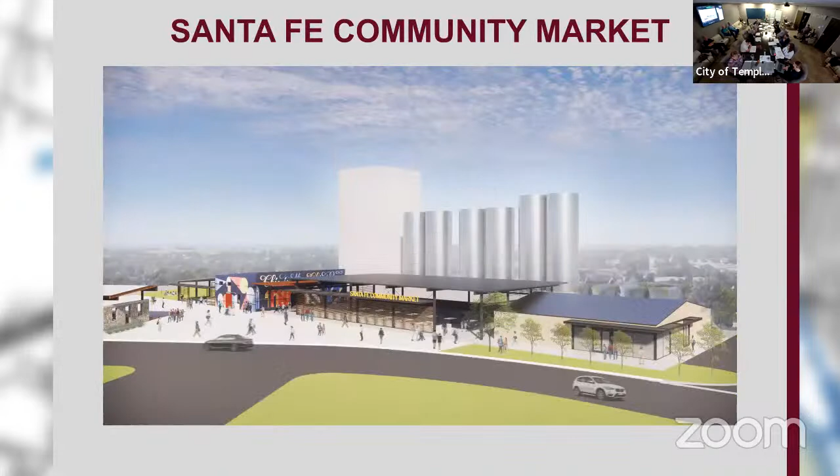This is one of those projects that would possibly be one that we would want to do before this one, right? But because of where they lie in the dollars, I think we still got to put the one on hold. Is that really confusing? Did I lose you all on that? We got two projects, one 3.5, one 4.5, because they're in two different years.

I wish we could release. This is one of those projects that is a priority that we're going to have to put on hold because of funding. We all agree with that one, right? Yeah.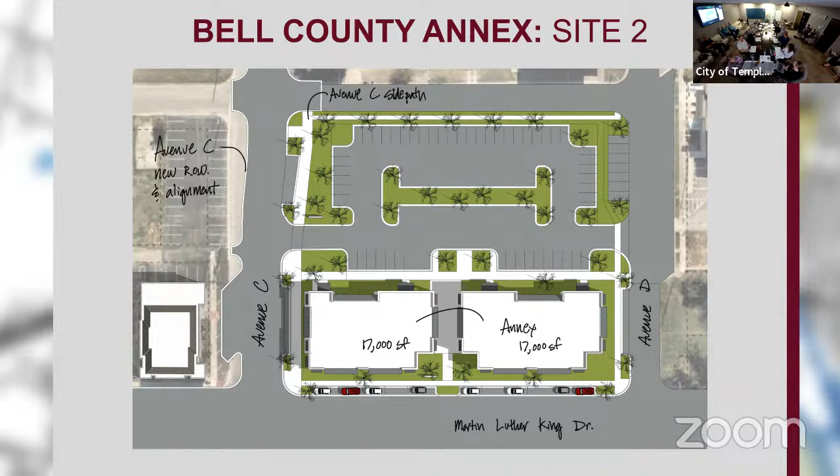But there will be a pathway. We'll be meeting later in the year. For Bell County Annex, we have chosen a site on Martin Luther King, Avenue D, Avenue C. I believe there is still some right-of-way land purchase issues. This is a drawing we've done ourselves as a vision document. I'm not sure it's been adopted by the county, so we sort of draw stuff that we like, but they're in control of their own annex.

I think the city is in control of some design standards. We have a document that says that we're going to give them 2 million, 2 million, and 2 million. In the document, I think, then I'm playing lawyer, but somewhere in that document it says the land's got to be purchased. This would be one that we can possibly slide the 2 million, one year.

Legal and staff are still confirming that would not require an amendment with the county, but still, they're really not ready to move forward, and I think they could use another year. I think everybody could use another year on this. Do we still sort of agree with that? Yeah, I think the county is going to need an additional year to meet their obligations.

So we're working on an amendment to the agreement, and so it would almost certainly result in moving that 2 million from 24 to 25. We would recommend leaving it in the financing plan until we get the amendment done, but then you could shift from there. Is your bottom line that you're showing in here with or without it?

Without it right now. Oh good. No, without moving it. Moving it, yeah. Just leave it in. So it would really help us in that 2024 window if we could get that changed. I'm going to keep on moving so that we can get to work.

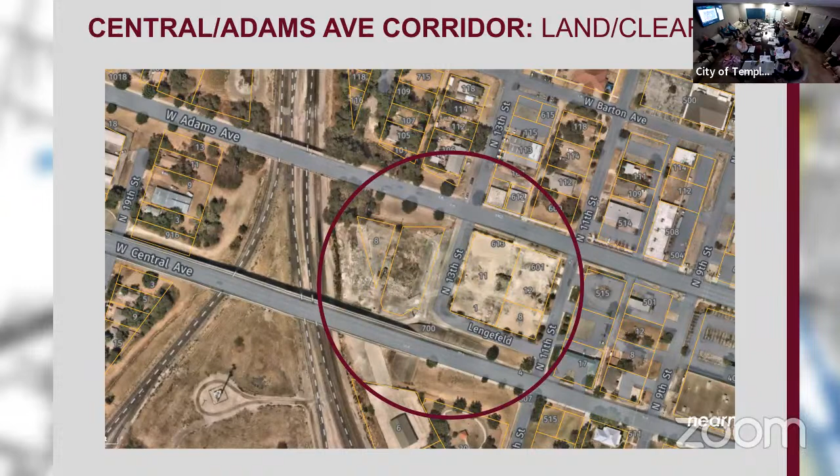This is the site that the reinvestment zone bought so that we could have some future properties, if you've driven by it. Most of the buildings have been taken down. We had 1.4 million in it for both purchases and demolition and all that. Demolition's completed. I don't know if there's any dollars left over on this.

Can we irrigate and seed that, do you know, or is that part of that? Where's Buford? Do you need your sheet?

We like, you can see that it's dirt and we don't like leaving dirt. The zone has half of our money. I don't know what the cost of that would be, but there are remaining funds. We're gonna push forward, even if there's no funds, we'll be back in the spring. But we don't take things down in our gateway and leave a bunch of mud out there. Look, in other places, we've made sure that if we have a tract of land, we do some minimal irrigation and planting and mow it so that it doesn't become an eyesore.

So this is moving along. It's a good project. Here's a project we've talked considerably about and haven't yet funded: Avenue A. It is absolutely our belief that we've done Main Street all the way down. As you know, we've got the city center going, and if we're going to do an orderly process of completing the streets, we need to design them all.

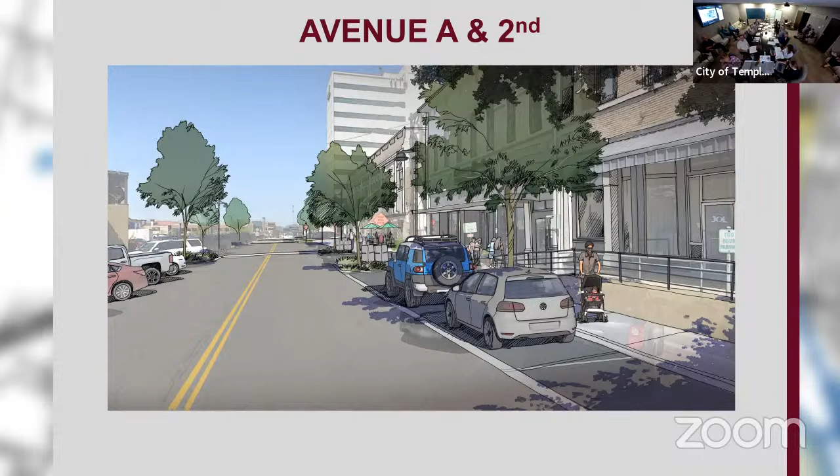They have now endured a good 10 years of having people try to swim to their restaurants. So we look forward to someday being able to get this corrected and really moving up and down. This would be Main. It's giving you the full sidewalk.

There's all kinds of stuff still going on in downtown. I still believe you've got the Extraco building out there, and we sort of said if you can turn that into a Marriott, we're with you. So maybe that's still going to happen. Who knows? I think they are. Their timing was different. They thought they would start building it today. They've got a lot of people in that building, and they're moving people out. So once all those people get moved out, we'll see what happens.

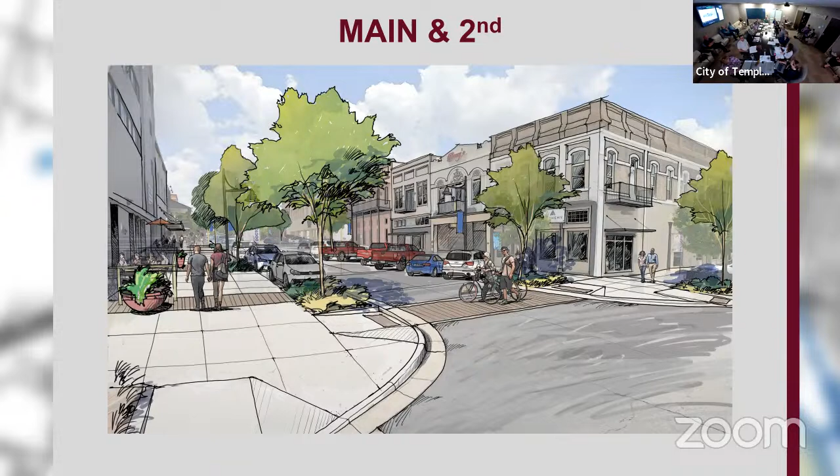That's an important issue. The things that could happen from 3rd Street on over to 4th, we need to keep on moving. He has a submitted proposal for $776,100. Did you guys plug this in for 2024, or is that still a floater?

So if we're short, well, we're going to keep going. There are numbers we're going to have to shuffle around. Veterans Boulevard, this thing has been on our radar screen for also 20 years.

We've done small little projects in the process of doing the projects. We've realized that you can't really move this project forward without taking care of the drainage. The drainage lies within that green line. If you drive down Veterans Boulevard right through that entryway, you can see all the water coming out. Right now we can't handle it.

So we are breaking this project again, sort of in two. We did a drainage study. We've done a design for Veterans, but now we've got to concentrate on actually bringing the drainage to fruition so that we can move the project forward. So we're taking the $10 million we currently have, breaking it into the road and the drainage. We're putting 6.7 into the drainage for 2024.

And I did a little left turn on tracing and measuring this. You guys may not have seen this, but Brandon, you asked me a question, did I have enough money in right-of-way? We did not, but David had dropped a lot of his right-of-way money into those lump sum dollars, so we broke them out. I took the 1 million out of the 6.3, dropped it down to right-of-way. That gets you a long ways along, and we think we can have savings in both the drainage numbers and the road numbers to get this project going.

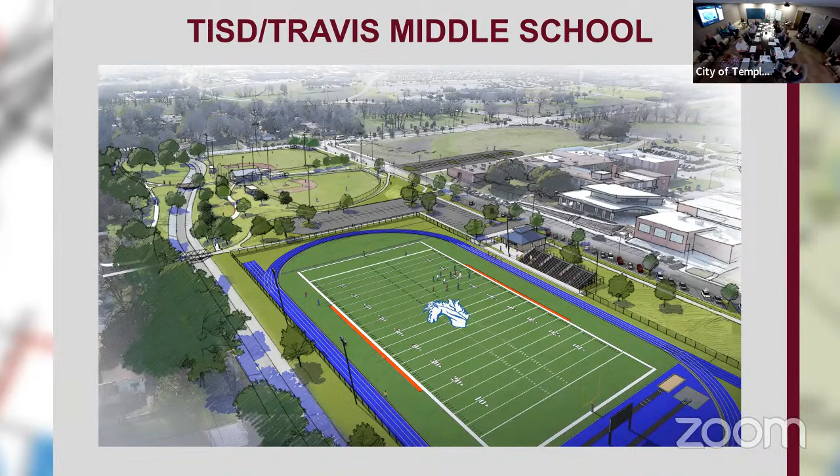It's a mess. If you think about that drainage, that project they're going to be doing is also what's dumping into the green line we had back here. See that to the north, that's going there. That's all floodplain, so we're fixing all of that. All this water is coming—the line from Veterans and Temple College is coming into this. That's called a confluence, that's where 2 floodplains come together. Flows underneath the loop and is heading south.

It's a mess. It's one of, I always tell Brian, our last drainage problems, but it's just the last of the most current. Anytime he tells me it's the last one, I don't believe him. I always been hoping it's the last one for the zone too.

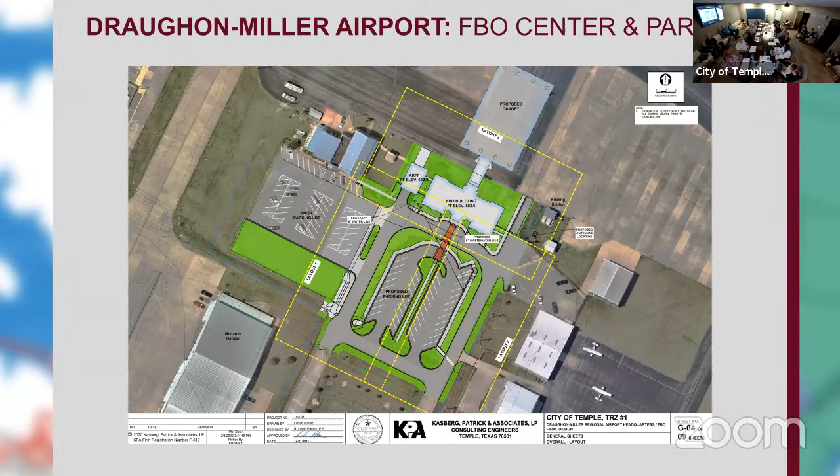What do we got going here? Let's keep moving. The airport, this is a wonderful thing. If you guys are out there, it actually opened up, is completed. Had a grand opening. If you get a chance, you should go out, take a look at it. A $6 million project. It was great while we're sitting there, 3 jets come in.

I just don't know if anybody realizes the traffic that we have that is above and beyond GA. It was sort of fun. We were out there. Sean came over and said that jets are coming in from SpaceX, but they wanted to be diverted away from the FBO because their security detail weren't going to allow them to walk through all of us. So that's sort of fun. You realize finally Elon, he spends quite a bit of time coming in and out of there.

Sean, again, time-wise, I gotta keep moving here, you guys. I apologize, but

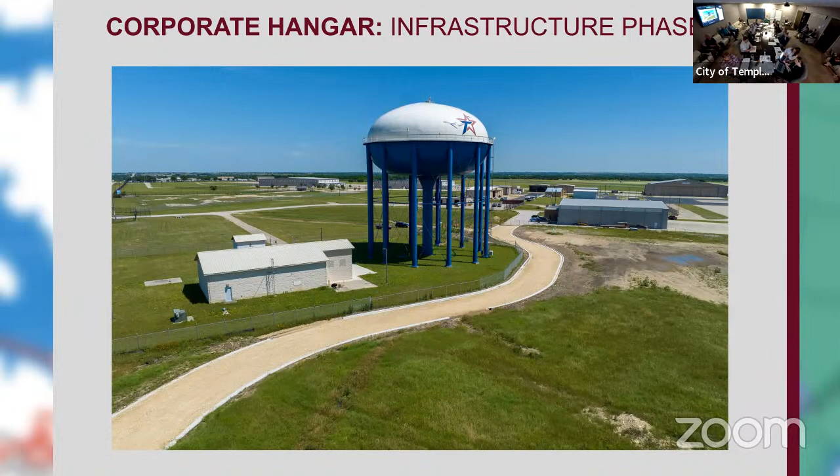This is also the expansion of the business executive part where the larger jets are parked. I believe Sean's already got 2 additional ones that are already coming in. I believe SpaceX is possibly a client for out there. She's got that, what is she flying? G650. G650, and that's that larger one. Sean sent me a video, you guys, because we were bitching.

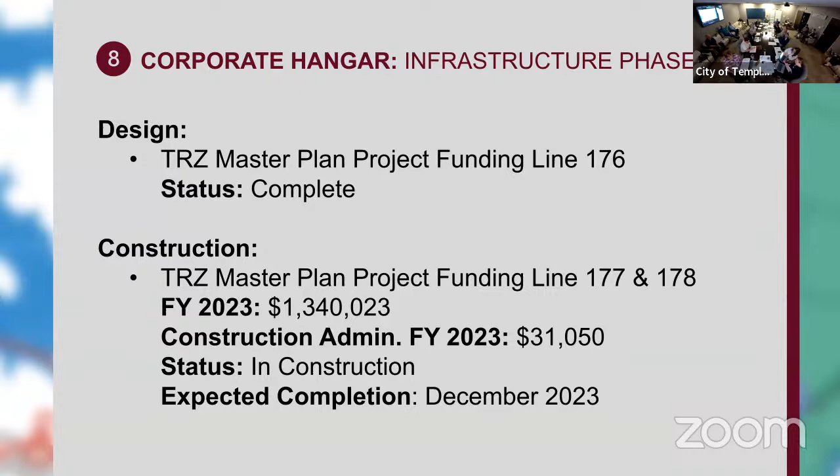This is the roadway, water, sewer to making sure that he can add additional business execs. This is a new project that we weren't sure was necessary. If you look, you can see the floor plan of our FBO there. So that's when this was taken. We might get an updated photo just so we can show that picture. Maybe even be nice to replace it by Wednesday. The FBO, what we show in this picture is that we took probably 4 or 5 tie downs, and we thought that you see that big field out there, that we're just fine.

Sean sent us a picture, a video he did about a month ago, and everything to the left and the right were full of jets. It's just crazy that we had that amount of traffic coming into Temple. I always tell anybody, go take a look at it. Everything we're about in here is helping quality of life so that more people want to live in Temple and have their facilities here. And so we're getting really close, this is how they get to Temple. Very few of them get in a car and come here, right?

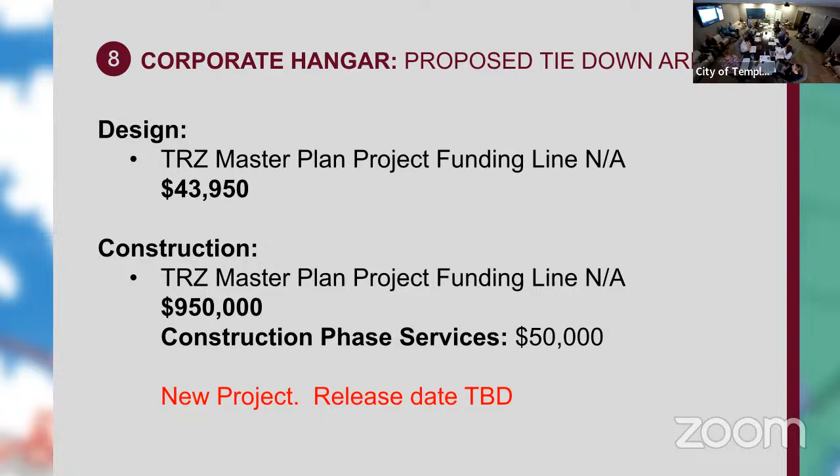This is a project you plug where you can. That's all right, that's me. I'm long-winded, but I've only done this once this year and I won't do it again. Except Wednesday. Well, you guys, we told everybody that it's a lot of slides. I'm okay if nobody wants to see them.

This is some taxiway improvements that are coming through. We have told the airport anytime they've got a matching grant, don't let it slip through the fingers, right? So we have dollars in there for them to do that.

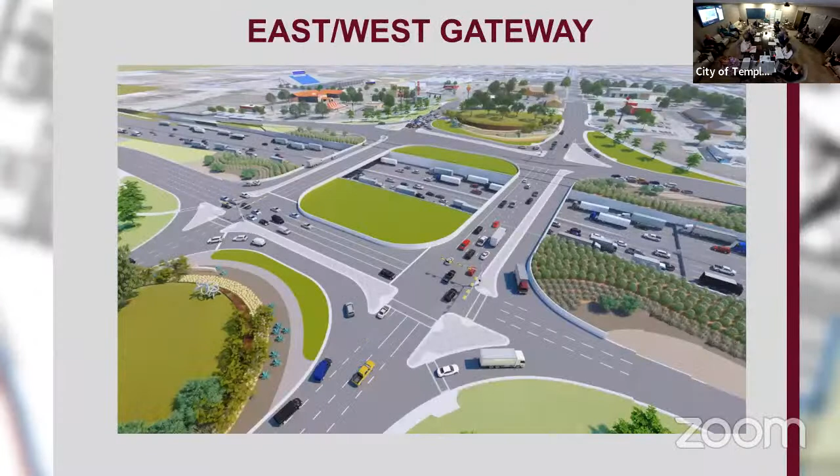The Arts District, long story short, that opportunity possibly has slipped through our fingers. And the current plan, we spent money to have a current plan. Really what had happened is a lot of the land that we were looking at has been absorbed, one through residential, secondly through about 2 million square feet of warehouse. And so what we'd like to do is just remove all the dollars and this plan from our financing plan.

That does not mean that we're not committed to an arts district. Bryn has in her budget a completion study. Bo, as you know, we made this presentation when you were actively involved. That everything that we did that day, everything we wanted to do still remains a priority for our community. We lost the opportunity to do the big vision in this quadrant.

We're gonna have to absorb and move forward on where should this be? Should it still be in that quadrant? For us, we had a plan. We looked at it. We were going to start moving it. We had dollars for it. We're going to shut that down and then re-up it as the staff and us and dollars come available to determine what can we do.

One last project that isn't anywhere in what we were just talking about - we have pretty much completed, or are close to completing, our 2025 master plan. I really believe it's called 2030, but we've been pretty good at getting our 2030 plan buttoned up by 2025. It's time for us in the next year or two to relook at Temple, Texas and our reinvestment zone and future dollars, and determine projects that make sense for our community. Bob asked for 250 to begin the process of doing that project. So if we could find 250 for 2024...

I'm done. That's an hour and a half. That's too long. Great job. That's too long, so it's gonna be dialogue. You guys, dialogue for y'all, you could do it in 2 hours to really answer every question and know your projects. In the board meeting, I would think 15, 20 minutes worth of dialogue - that I'm not gonna do. I'm gonna do it for you guys and answer any of your questions. Usually with the whole board, you're showing them what you got, and hopefully I can get through that in an hour and 10, 15 minutes. Any questions on the projects?